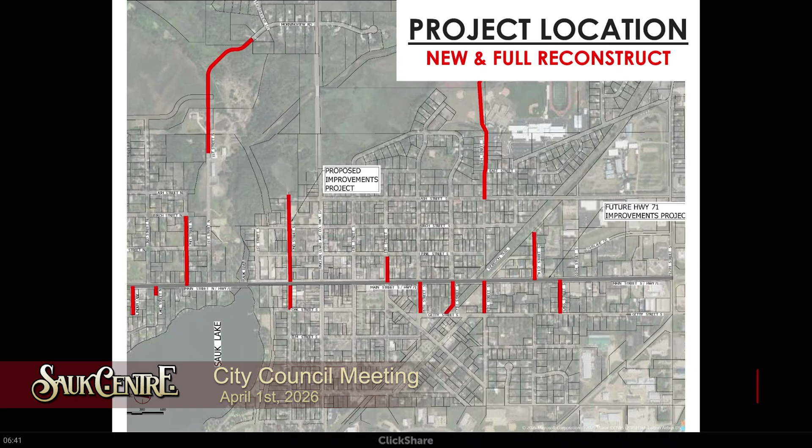Anyway, this is the feasibility report presentation. This is our project area, as you can see here, it's quite spread out. It's not like one of our normal projects where we might have everything congruent to each other, but there's little pieces all over, as evidenced by this. It is sitting sideways, so north is to the left in this particular picture here.

Go through, we have each of the segments shown here. We have Cass Street, 9 1/2 Street shown here. Basically, there's new sewer and water on Cass Street all the way up.

On one side, water goes all the way from Getty Street to Main. Sewer doesn't quite go all the way because the last lot is connected to Getty. We do have a little bit of storm sewer at the intersection.

Some of those are details yet that we'll get into as we move forward with plans. That storm sewer right there, it's possible we might pull that out and leave it part of the Trunk Highway 71 Phase 2 portion of the project. It depends on how we can connect things up. It's right at the intersection, so they could make those connections, but we'll have to make some final determinations.

As to what phase this may end up going in. The cost necessarily wouldn't change. It's a question of when it would be done, when it makes the most sense for things to be done. But I do have it shown in through here.

We do have, as I've talked about, by splitting these, we'll have to make temporary connections. As an example here, the sewer and water will have to be connected to the existing sewer and water on Main Street. And then once phase 2 comes through, if you can see it, I'll point to it. I can use a laser, but it sort of disappears on these things.

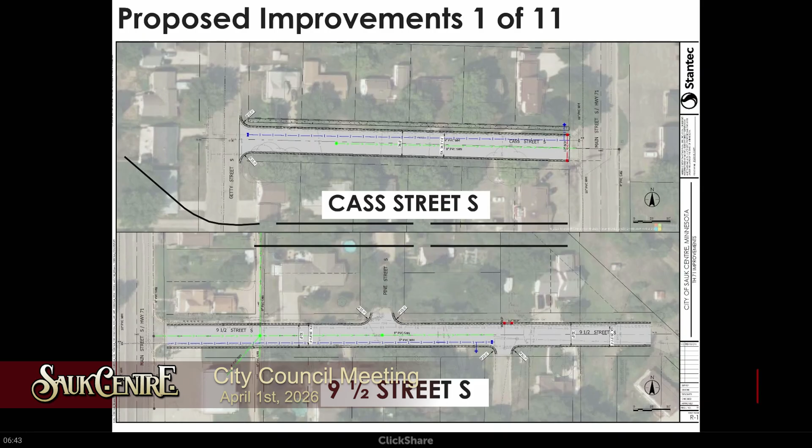Okay, whoops, I forgot, I'm sorry. This is... that's nothing I need there.

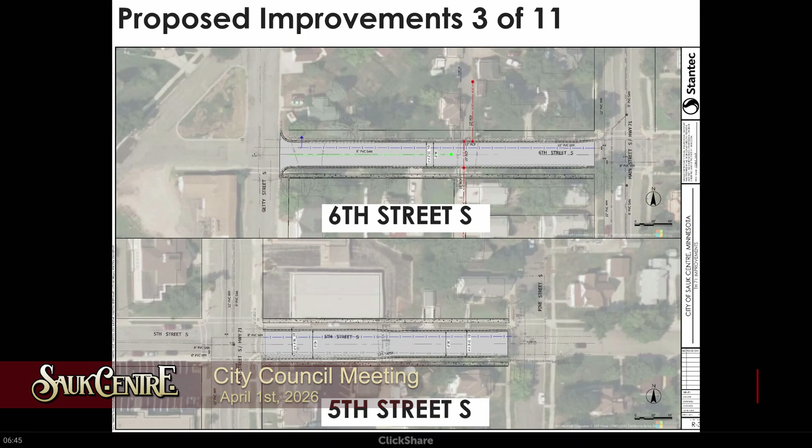So that's what's in through there. 6th Street South is a 36-foot wide street, and it goes between Main Street and Getty. We do have our water. We have sanitary that's half the block, and this is the rest of that storm sewer that comes through the alley to the north side of 6th Street, and we do have sidewalk on the south side of 6th Street South through here.

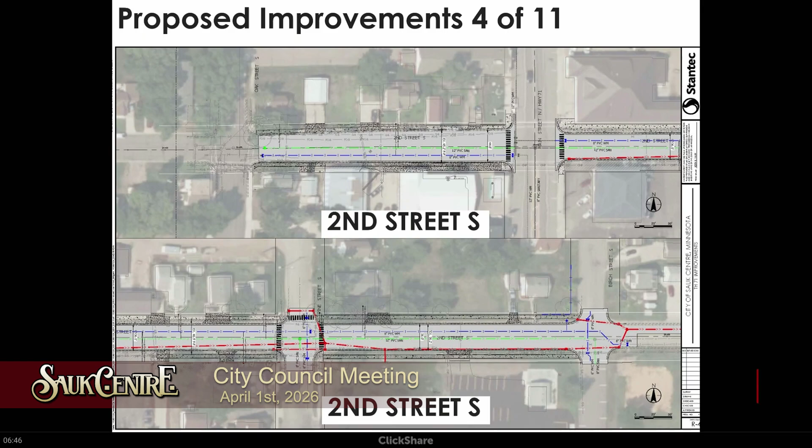The green is sanitary water that's all replaced, everything down to Birch. And then continuing on, this is just a patch where we'll be putting storm sewer through that comes all the way down into ultimately a ponding area that's at the very end of 2nd Street South at the east end.

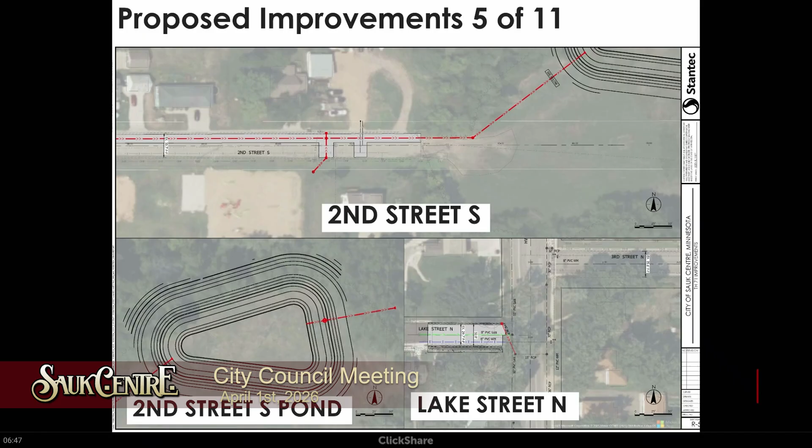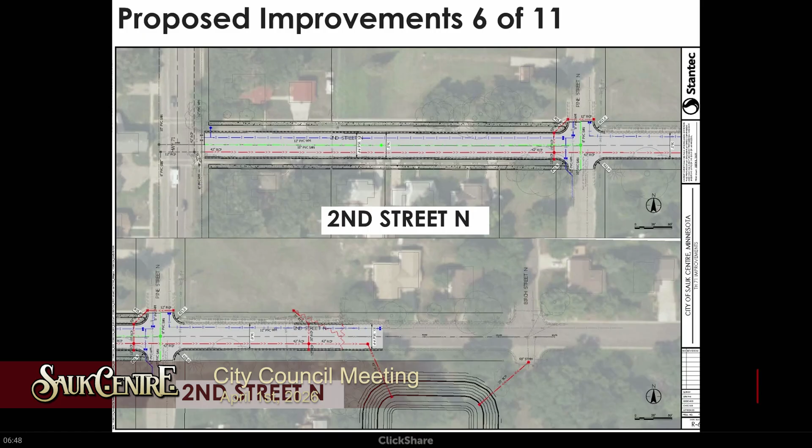As we come past Pine, this is the rest of it coming down to about halfway between Pine and Birch. Our storm sewer then comes down into a ponding area, which is on another section you'll see. We also disconnect and reconnect the storm sewer coming off of Birch back into that ponding area. We'll have another slide of that ponding area in just a minute.

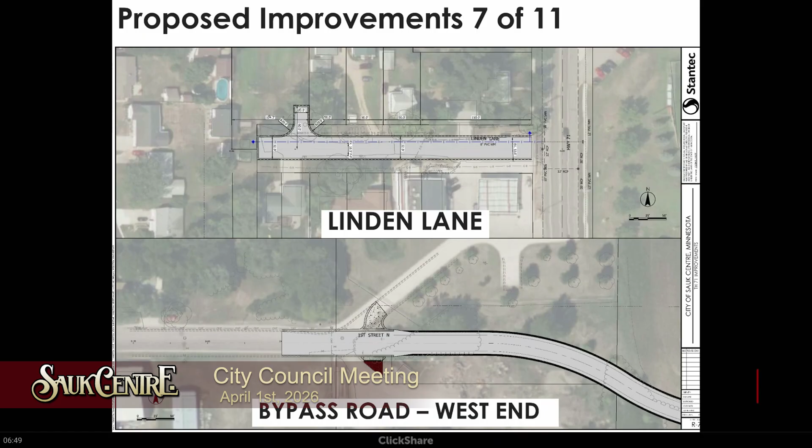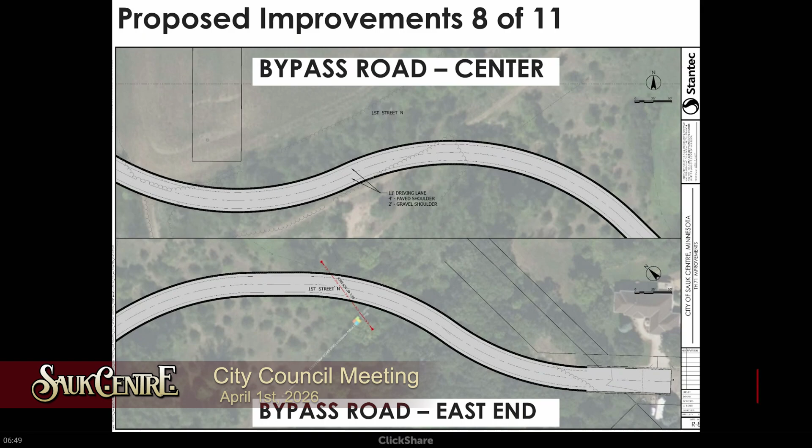This one shows the storm sewer pond between 1st and 2nd Street North, what it would look like through here. We've got a little bit of a berm in the middle, that's where water would actually flow over that portion. We also have a water main that comes through here still to the well on the south side of 1st Street North.

There's a new connection across 1st Street, a new pipe that goes across and empties into the ditch along the south side of 1st Street North. This goes back to that alley between 7th and 6th. So this is that sanitary and storm sewer that comes all the way up through the alley and goes just a little bit north of 6th Street South.

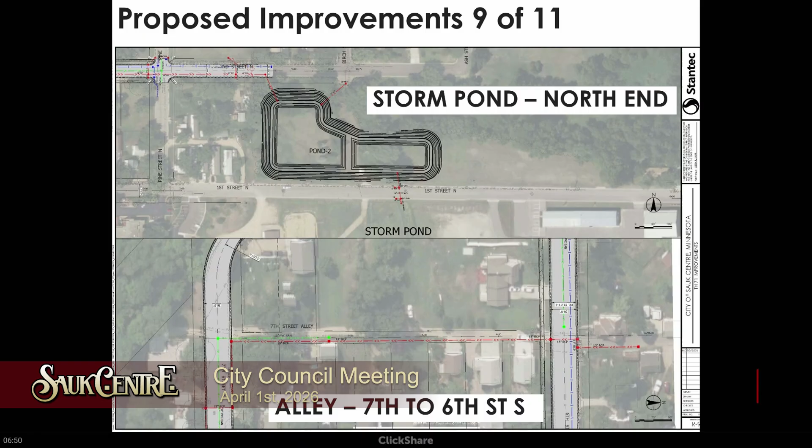Going to 8th Street, it's a full reconstruct all the way to the end. We are showing currently a full cul-de-sac on the end. That is something we'll discuss.

We've talked about whether we could do something smaller, maybe just a hammerhead turnaround, as a way to reduce some costs and also reduce the easements we'd need in this area from property owners. This property owner, as well as the school district, owns a couple of small parcels here. So this will be something we'll have to discuss with them, and perhaps do something different as to what that turnaround really needs to be.

But for our purposes now, I wanted to show the worst-case scenario, so we showed a larger cul-de-sac. It would fit in here, so it is doable if we want to go this route.

The storm sewer, shown in red, is the connection for Ash Street, where we just did the 2025 work. It continues on to the east, comes up, connects in, actually follows the existing line through here, so that's exactly what's there now, just a much smaller pipe and an easement. Water comes all the way to the end, sewer runs through here.

One thing to note is there isn't a lot of right-of-way through here. This is similar to A Street on the other side. We can only fit a 33-foot roadway, and that's what's shown through here.

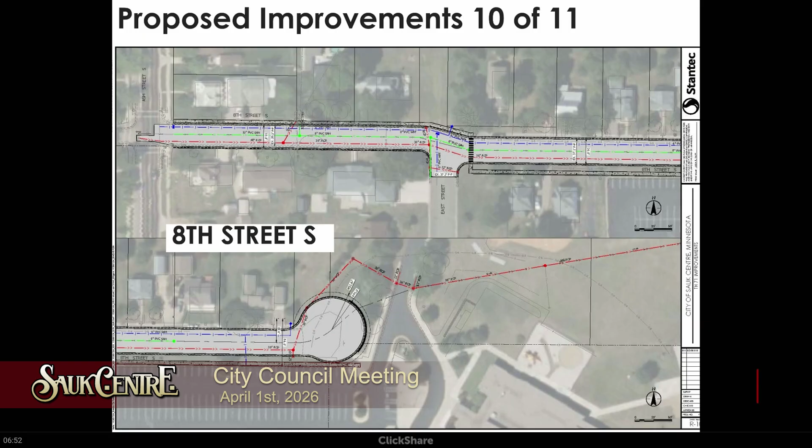We have sidewalk on the north side of the road on 8th, which connects to what is on the other side of Ash Street. We do have a crossing here as we connect in to go down for the school, along through the school, connects into their system over here. So that's what's proposed for the sidewalk in those areas.

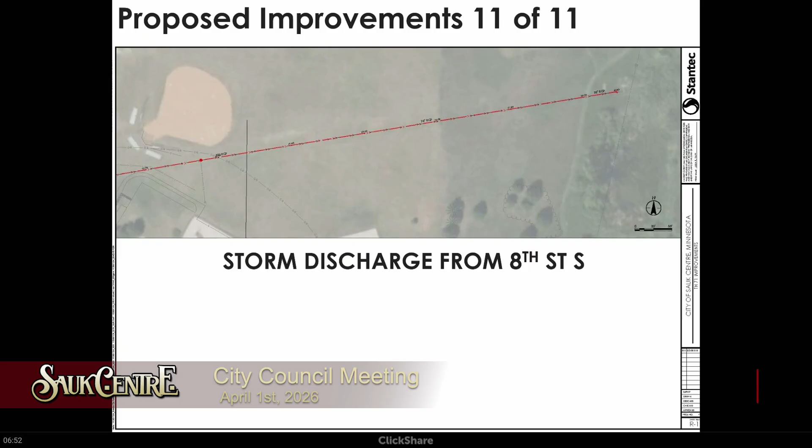Lastly, at the very end it goes through the school and discharges into the floodplain on the far east end. With that, I'm just showing a couple of pictures.

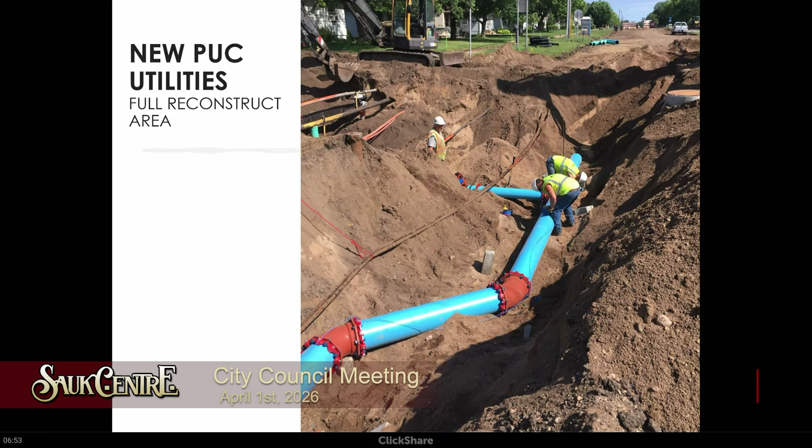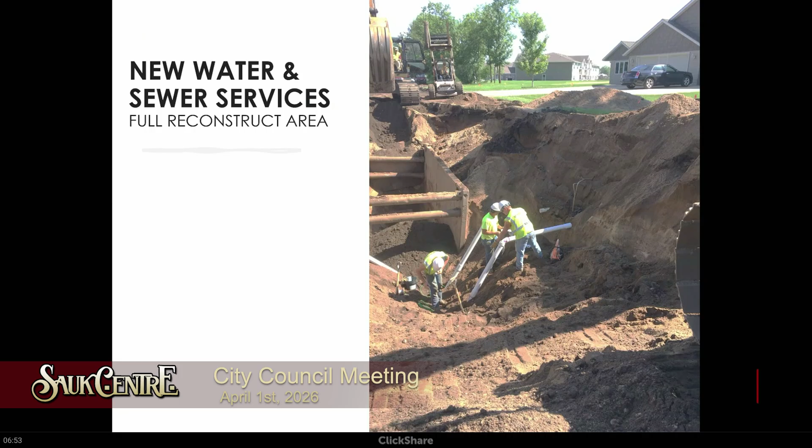You've seen some of these before, showing what kind of water main PUC would be paying for these things, what the utility looks like on the water side and sanitary sewer. These are typical of what some of the sewer and water services would look like for homes, and what storm sewer construction looks like through there.

This is our street widths. We have some different things here, we've labeled all the streets. Our existing widths vary from 30 to 45 feet wide throughout the project. The proposed widths are basically 36-foot face-to-face, except there are a fair number of exceptions.

9.5 Street is 32 feet, which is about what it is right now. 7th Street is 28 feet on the west end, from the alley going west up to Getty, and we talked about not having parking there because we just don't have room. 5th Street is 36 feet, varying from 36 to 40 feet. 2nd Street South varies, with the widest end at 44.67 feet, from Oak to Main.

Linden is at 32 feet, as we discussed. 8th Street South is at 33 feet between Ash and East Street. And as I mentioned, the bypass has a 30-foot total paved top, which is 2 driving lanes with 4-foot shoulders on either side.

So it's 22 feet of driving, 11 and 4 foot, and 4 foot on either side is paved. And then there's an additional 2 feet of gravel on either side of that as well. So those are the street widths.

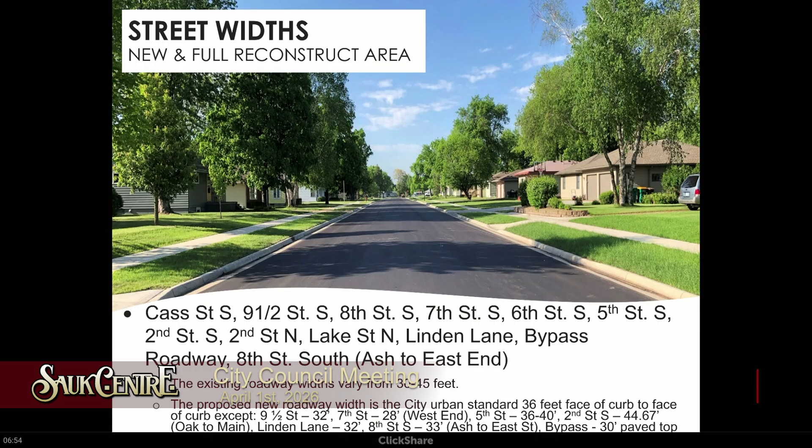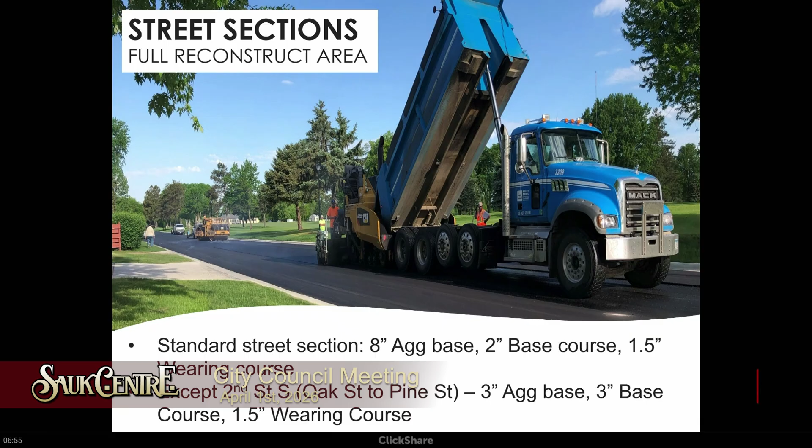The cross sections for most of it would be our standard 8-inch aggregate base, 2-inch base course, 1.5 inch wearing course, except 2nd Street from Oak to Pine, which would be 3-inch aggregate base... sorry, it's supposed to be 8-inch aggregate base, 3-inch base course, and 1.5 inches of wearing course through there. So it's got a little more stout construction for the traffic we get through those areas.

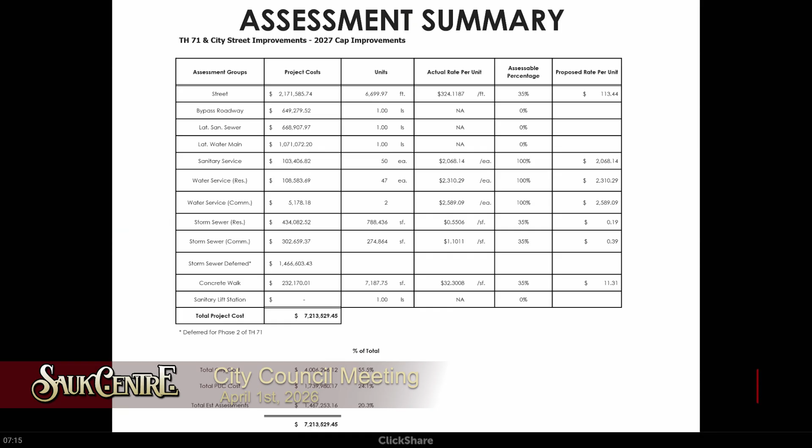We'll move on to action items. 7A, approve Resolution 2026-21, receiving the feasibility report and calling for a public hearing on improvement of Trunk Highway 71 Phase 1.

She's getting everything shut off.

Okay, this is the feasibility report we just received tonight. What happens next is we would call for a public hearing on the improvement, and then we would have notices out to all of the residences that are in the affected area. After that public hearing, if they move to go forward, then we would order those final plans and specs, and then go out to bid. So what's before tonight is to receive the report and call the hearing on the improvement.

Because of the advertising that we need to do for the hearing, we can't do it at the next meeting, so I proposed either the May 6th meeting, or April 29th, the week before.

So basically, by taking this step, we are saying we're going to move forward with Phase 1 and continue on. It means we're going to have a hearing with the public to decide if we're going to move forward. We're going to present to them the costs that we just reviewed, basically. Right.